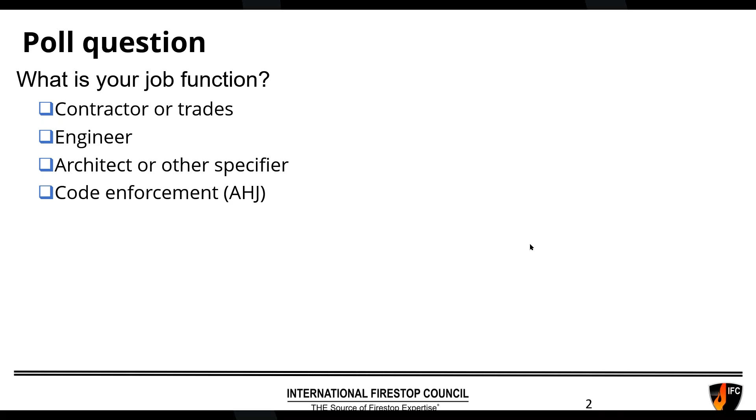So what are the objectives for today? Well, we're going to talk about joints and about penetrations. We'll talk about joints first. Why? Because that's where the change is the largest in the 2020 National Building Code of Canada.

So we're going to speak about how the fire stopping of joints was governed by a general continuity requirement in previous editions, and how now in the 2020 edition, there are some very specific joint requirements telling you pretty much exactly what to do. For penetrations, we'll do similarly. We'll talk about the 2015 and previous NBC code requirements, just so we have that as a baseline, and then we'll go through the changes in the 2020 code.

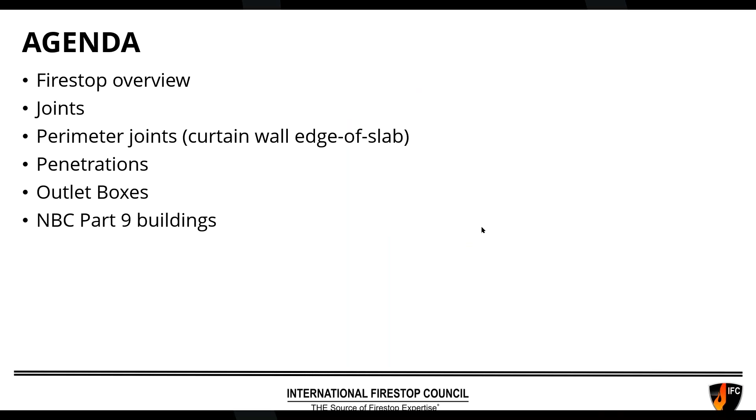All right, so we're going to structure the agenda as follows. First, we'll just do a general Firestop overview. We'll discuss joints. We'll discuss a very specific joint after that, the perimeter joint, also known as the curtain wall edge of slab joint. We will discuss penetrations, penetrations that only go through one side of the wall, meaning outlet boxes. Then for those of you who work in smaller buildings, known as Building Code Part 9, we'll discuss any differences and similarities between the Part 3 buildings and Part 9. So the general presentation today will focus on Part 3 of the Building Code, because that's for large and substantial buildings. I will give you the differences in Part 9 in case you do work on those buildings.

Now let's discuss fire separations. I'll discuss in a moment what the definition of a fire separation is, but the important thing to realize is that it's the building code that decides which assemblies are going to be fire resistance rated fire separations. So when it comes to walls, wall fire separations are more commonly based on what is being protected. So for example, if it's a corridor, that would be a fire separation, a fire rated corridor, maybe protecting individual dwelling units.

Separating different occupancies, separating hazards in a building. So that would be the need for fire walls within a building. And then the code will separately, usually independently, also require fire rated floors.

And those will be more of a function of the height and the area of the building. So the bigger the building gets, the more likely you're going to need a fire rated floor, and it may even go to 1 hour, 2 hours or more. And also the taller the building gets, you'll also need more fire rated floors.

Why? Because in each case, what we're trying to do is win a race. And the race is between the fire starting, growing and spreading, smoke spreading, fire spreading, and people trying to get out of the building, as well as first responders needing to get into the building to do whatever they're going to do, whether it's search and rescue or fire suppression.

So just to give an overview of how the National Building Code of Canada has evolved on fire stopping, it is not new. In the 2005 and 2010 editions, it only touched on the basics. It was very kind of rudimentary. There were some confusing and, I would call, ill-advised exceptions or specific requirements, things that added confusion more than clarity. The definition of fire separation was improved in those cycles, so that was a good help. In other words, telling us what our fire separations are all about.

In the 2015 edition, there was a revision made to add membrane penetrations, meaning holes for outlet boxes, and we will discuss those in detail. Now in 2020, this is where there was a large number of changes. The committee put together a Firestop task group for several years with some great representation from across the country. Very highly knowledgeable people from UL, ULC, from each of the provinces, from some of the cities.

And so they just did a great job at revising the code to really bring it pretty close to the state of the art. A lot of the bad exceptions that existed previously were deleted, and where there was some vagueness or things were causing confusion, clarity was added to those code articles.

Now, some improvements can still be made. Unfortunately, those won't come out in the 2025 edition. There were some other priorities for the code committee. They had a shortened cycle since the 2020 code only came out in April of 2022. So with that shortened cycle, there was really no opportunity to prioritize or work on anything Firestop related. So hopefully in the 2030 edition, there may be some further improvements.

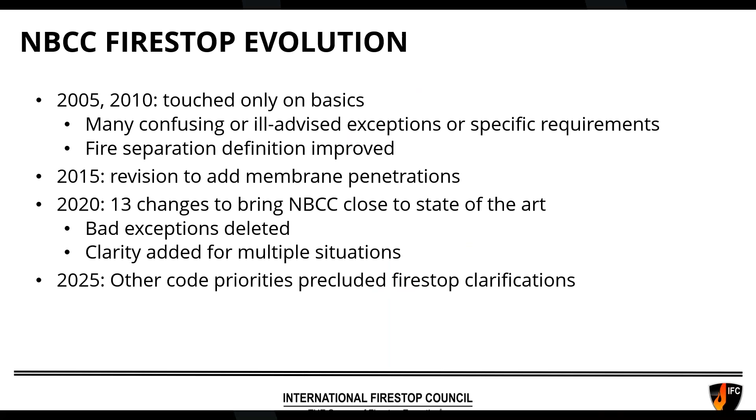So next, let's talk about what is fire stopping. I'm going to start with an unofficial definition, and after that, I'll show you the code definition. So unofficially, but maybe more clearly, fire stopping is a precisely tested means and methods to restrict the spread of fire and smoke through a breach or gap in a fire resistance rated assembly. So in other words, you have this perfectly good 6-sided box with 1 hour, 2 hour, 3 hour, 4 hour rated fire separations, but you're going to have holes in it.

Now, today we're not going to deal with doors and windows. That's a seminar for another industry and another day. But today we will deal with all the joints that are inevitable in that construction, and we'll deal with the penetrations in that construction as well.

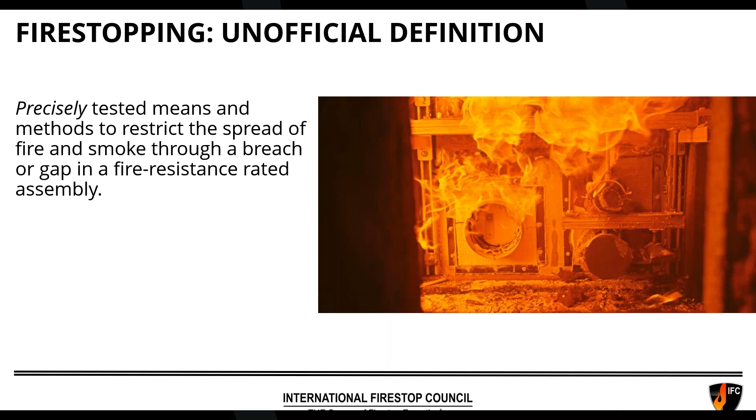Now, the code does have a definition. The definition itself has not changed, but they have changed the word. For some reason, the 2015 and previous editions of the NBC were somewhat of a laggard. It was the only standard out there that was using fire stop as 2 words. Now they've pretty much harmonized, including with the fire test method. So it's just 1 word, fire stop. So if you had been using it as 2 words, I'd encourage you to just harmonize as well and start using it as 1 word.

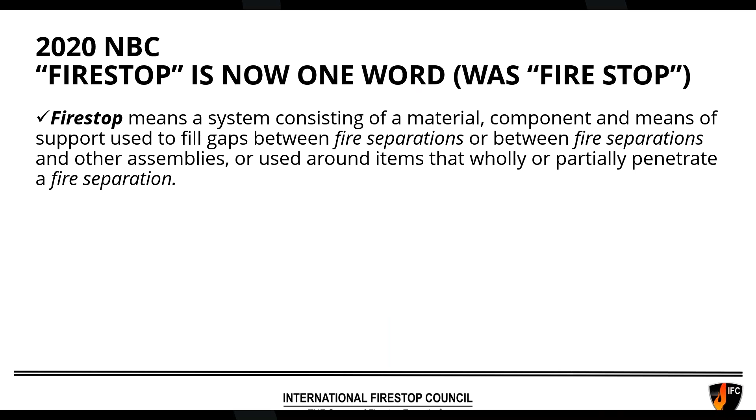So here's the code definition. It is a system, and I want to pause there because that is the single most important word. So I'm glad it's right at the beginning. It's not a material, it's not a red caulk, it's not a product in a box, it is a system. It consists of a material, component, and means of support used to fill a gap between fire separations or between fire separations and other assemblies. So for example, between a wall and a floor, even if the floor was not rated, or used around items that wholly or partially penetrate a fire separation. So if you have anything going into a fire separation, or if it goes all the way through, those require fire stopping as well.

Aaron, if you can, it would be great if you could show the results of the poll after you close it.

All right, sharing the screen.

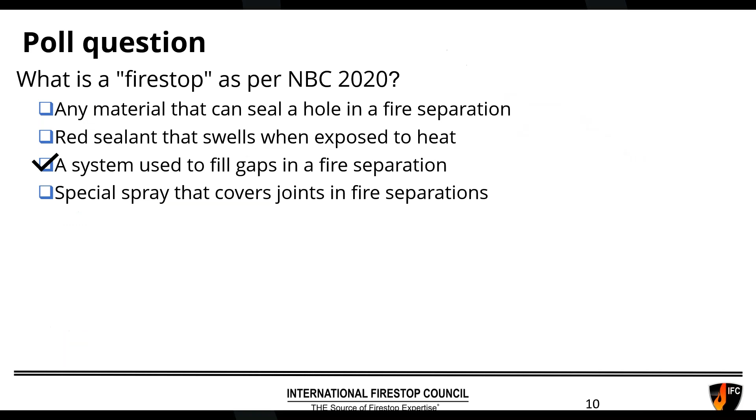All right, okay. So continuing on, I said that I would give you the definition of a fire separation. So the code has a very neat and tidy, just few words for that. It's a construction assembly that acts as a barrier against the spread of fire. So almost self-evident. But in the National Building Code of Canada, if you're not aware of it, there is a section called the Annex 1. And what they do there is basically non-enforceable, but it's the committee giving you additional information so that you would help understand what the enforceable parts of the code say. So there's a very useful annex note for the definition of fire separation.

It's generally understood that the term fire refers to all products of combustion, including heat and smoke. So that's useful to know, and that we're going to want to stop heat and smoke through a fire separation. Although fire separation is not always required to have a fire resistance rating, it should act as a barrier to the spread of smoke and fire until some type of response is initiated. If the fire resistance rating of a fire separation is permitted to be waived on the basis of the presence of an automatic sprinkler system, it is nonetheless the intent of the code that the fire separation be constructed so that it will remain in place and act as a barrier against the spread of smoke until the sprinklers have actuated. So by the way, this might surprise you.

There are some fire separations that are going to be 0 rated. As this annex note tells you, it still has to stop the movement of fire and smoke until some kind of response is initiated or actuated. Now, the most common case for that is where there's a sprinkler trade-off in the code. So the code is good at pretty much telling you what you must do, but in some cases the code only gives you the option or the incentive to put in fire sprinklers in the building. And when it does that, it often does that by reducing the rating of a fire separation to 0. Now, candidly, as you look out in building construction, 95% plus, maybe 98% plus of fire separations will be fire resistance rated. But some may be 0 rated, so just making you aware of that.

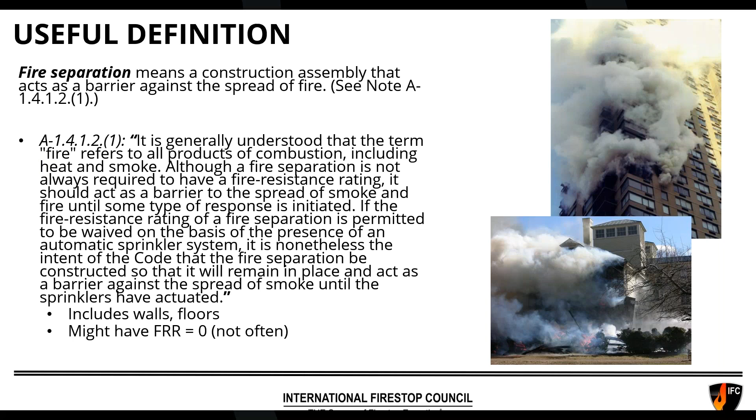So as I said earlier, we're going to discuss fire stopping as 4 separate major categories. We'll talk about through penetration fire stops, membrane penetration fire stops that only go through one side of a wall or one side of a ceiling, fire resistive joint systems, and then one very specific joint system, and that's the perimeter fire containment system, what you do at the edge of slab at the curtain wall.

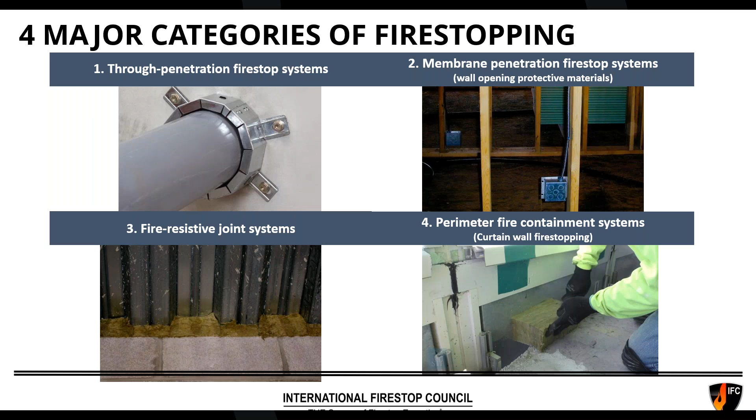Here's what the 2015 code said. So this was the text, and it was called continuity of fire separations. The continuity of a fire separation shall be maintained where it abuts another fire separation, a floor, a ceiling, a roof, or an exterior wall assembly.

So as I mentioned, if you have a rated wall, no matter what direction it goes to, up, down, sideways, it has to be continuous all the way until it abuts an adjacent assembly of some kind. And here we can read the annex note from 2015 code and earlier. The continuity of a fire separation where it abuts against another fire separation, floor, ceiling, or exterior wall is maintained by filling all openings at the juncture of the assemblies with a material that will ensure the integrity of the fire separation at that location.

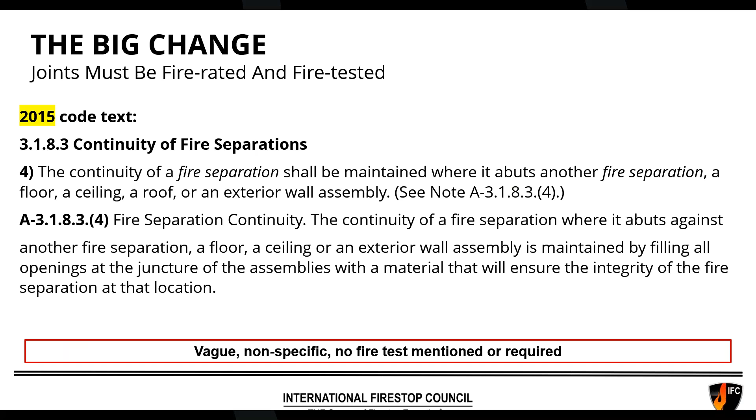So previous to the 2020 code, they were still using the terminology of material. And why is that? Because if you look at the definition or the requirement for continuity, it doesn't mention anything about a test or what the test should be or what the rating of the test should be. So really, it was very simplistic. It just said you needed to do something. Now, fortunately, Canadian design professionals seem to be very knowledgeable and have been installing systems nevertheless for more than a decade, but the 2015 code did not exactly say that.

So now let's compare that to the 2020 code text. For continuity of separations, it's the same section title, but now the content is very different. So here's what it says. Except as provided in sentence 5, the continuity of a fire separation having a fire resistance rating that abuts another fire separation, a floor, a ceiling, or a roof, so in other words, side to side to top to bottom, shall be maintained by a fire stop. So notice that earlier on it had said a material, now it says maintained by a fire stop, conforming to sentence 3. Sentence 3 will now give us the details of how we accomplish that.

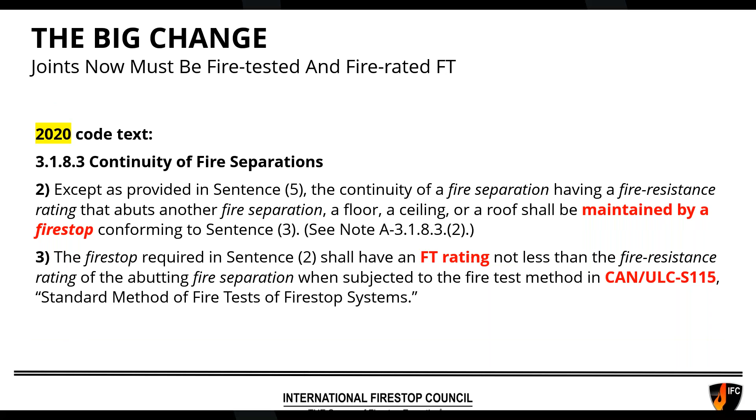The fire stop required in sentence 2 shall have an FT rating. So now we know the rating, and I'll explain what the ratings are. Not less than the fire resistance rating of the abutting fire separation when subjected to the fire test method in CAN ULC S115, standard method of fire tests of fire stop systems. So the key points to remember here: the joint has to be sealed with a fire stop. The rating is an FT rating, and I'll show you the ratings. And it's tested in the standard Canadian test, which has been used for decades, which is CAN ULC S115. You'll see a reference to that multiple times today.

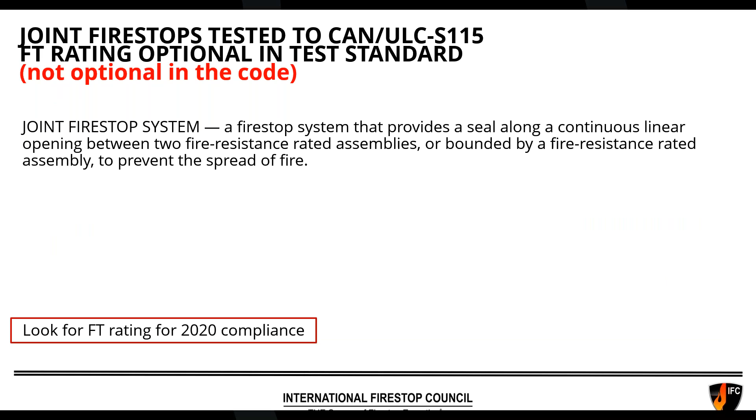So there is a definition of a joint fire stop system. Let me go through the definition first: it is a fire stop system that provides a seal along a continuous linear opening between two fire resistance rated assemblies or bounded by a fire resistance rated assembly. In other words, sometimes it's where a fire rated assembly meets a non-fire rated assembly to prevent the spread of fire. Now, in the test method itself, CAN ULC S115, it does not mandate that you have to achieve any kind of rating, as long as you achieve an F rating, which is the fire rating. The T rating is essentially optional, but as you saw in the previous slide, the T rating is now mandatory in the 2020 code. You need an FT rating.

So how do we measure these F and T ratings? Fire is just the passage of flame, passage of fire. And the T rating is done by putting thermocouples on the non-fire side of the test assembly. So you can see the thermocouples here. They're little electrical pads, I'll call them, or electrical probes. They have a little pad on top of them so that we're not measuring the room temperature, we're measuring the joint temperature. And when it gets too hot on the non-fire side, that's the point at which we have failed the T rating.

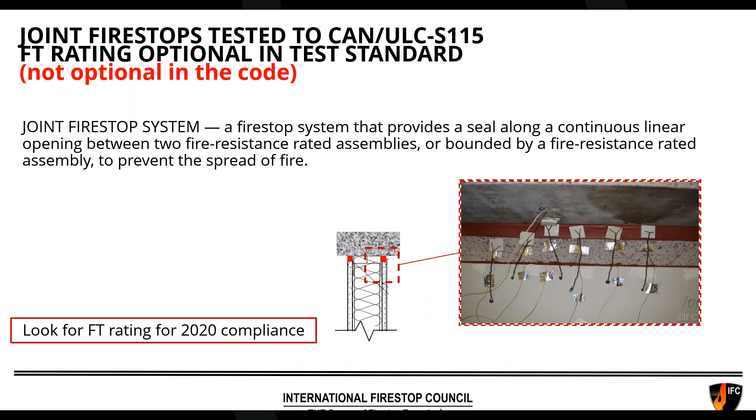So now I've shown you a picture of a rather small assembly here. The dimensions of the test apparatus are maybe about 1 meter by 1 meter, sometimes a bit larger. Now, some joints have to be tested in much larger scale furnaces. In other words, it's the same scale as the CAN ULC S101 furnace, and that's expansion joints. Expansion joints are those large joints you see in a parking garage or that you don't see in a building between major pieces of the building slab. And so those are much larger, the gaps are much larger, they may be 100 millimeters or even 200 millimeters. And because of their size, they have to be tested in much larger scale furnaces, but the ratings are the same, and basically the test method is analogous, just in a bigger scale.

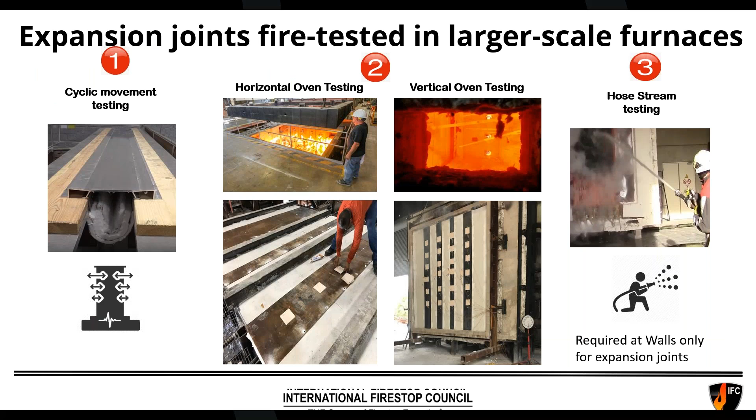Now, another thing we have to remember with joints is that joints in a building will actually move. Very few joints are static, most are dynamic. Why is that? Because things are happening to a building all the time. As an example, when you have a floor slab, it doesn't look like it, but as you add a live load to that floor, it will move. As it gets warmer and colder, things expand and cool, you will get movement.

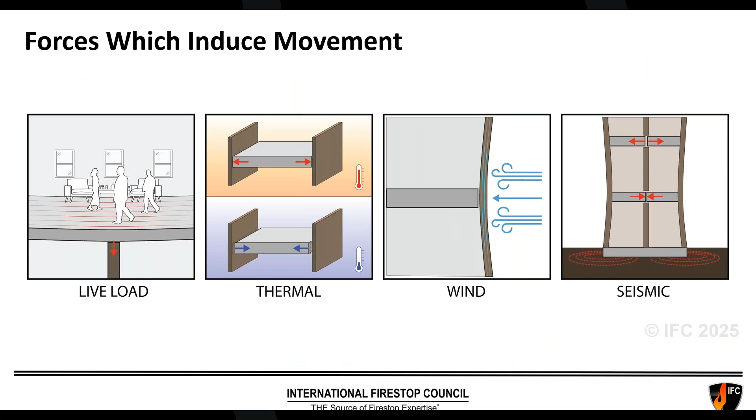When wind blows on a building, you get movement. And of course, if you're in a seismic area, you know for sure that if there happened to be a tremor or an earthquake, there will be movement. So the code does mandate that the designer and the installers consider that movement. So this is not new to the 2020 code. That was already required in previous editions of the code.

If I look at Annex Note A-3.1.8.1, here's the exact words. When choosing products for fire stopping, the physical characteristics of the material used at the joints, as well as the nature of the assembly and its potential movement, should be taken into consideration. So the reminder has always been there: don't forget about the movement in selecting your joint.

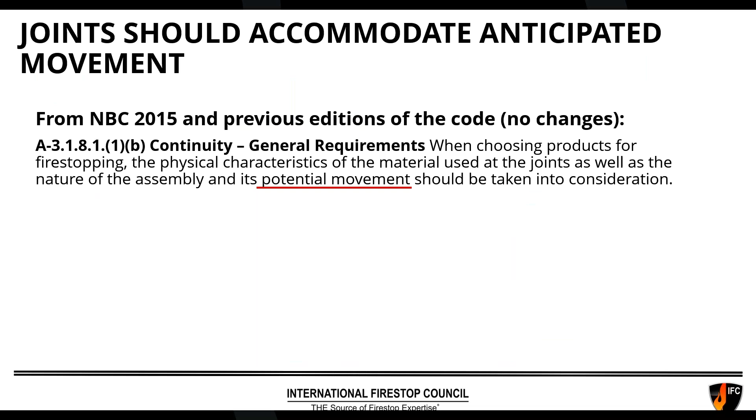Now, in case you're wondering how we test that movement, we actually test it before doing the fire test on the joint. So it's per an ASTM test standard, ASTM E1399, tells us exactly how to run that cycling. It's basically 500 cycles essentially in most movement tests. So you can see on the left the picture, there are hydraulic jacks that basically cycle that joint up and down, closed and open, closed and open. And so this is how we make sure that once the joint is installed, it will survive and continue moving through the life of the building.

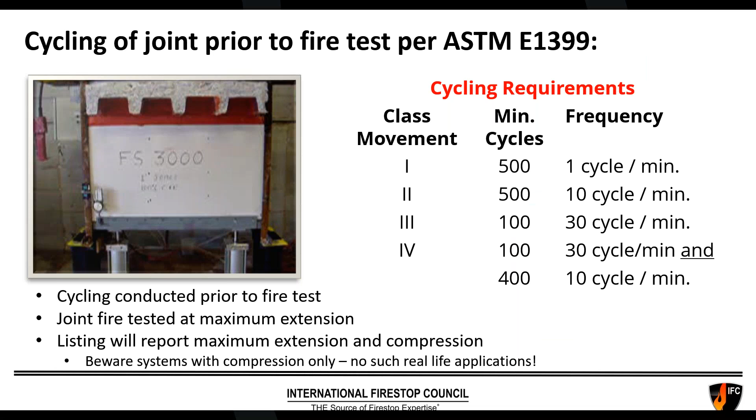There's been a good annex note added to explain joint continuity. I'm not going to go through all of it. You have it in your handout, so if you want to read it at your leisure, but I'll just point out a few of the things that are important here. For example, it does talk about joints being needed in the first paragraph, even without a fire resistance rating, where it abuts a fire separation.

Next, in the middle paragraph, what I want to point out is that there's a separate requirement for curtain wall joints. So we will get into that in more detail, but it's discussed in more detail here in the annex. But finally, what I wanted to mention is what's in the last paragraph. So once again, the code is reminding us about movement. So if you look at where it's underlined, it says the rating of the joint system will be maintained even after the joint has cycled through its anticipated range of movement over the service life of the building.

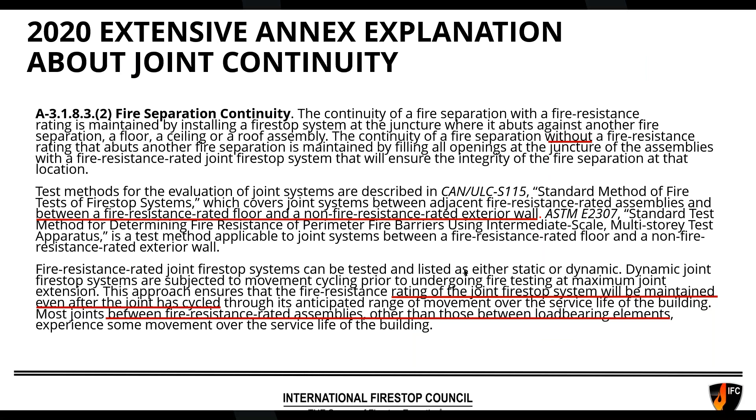Most joints between fire resistance rated assemblies, other than those between load-bearing elements, experience some movement over the service life of the building. So if someone proposes to you a static joint system, you should ask a few questions. And even if someone proposed to you a dynamic joint system, someone has to verify that it will accommodate enough movement as the design engineers or architects will tell you needs to happen.

Now, because the code added this very clear section on joints, it was felt that it was important just to mention that you don't need a joint fire stop system wherever you have a joint between two boards. So a brand new section was added to the code under continuity, and basically it's for the joints at corners and between walls and floors when you have gypsum board. Essentially, it's telling you that if you have the joint as required in the ULC fire tested assembly, fire listed assembly, that you don't need fire stopping there.

So basically the thing to remember is if you read the listing for rated walls, you're going to find that it always tells you need butted joints. As soon as the boards are apart, physically apart, then they're no longer butted. But if you have butted joints, it's perfectly fine to mud and tape them. Same goes for the interior corners, exterior corners, etc.

So now we'll start another poll question. Aaron, if you can launch this one. So which are true regarding joint fire stops? And I'd like you to click all the ones that you think are true. More than one is true. Aaron, I see that you have to scroll it down a bit so people can see all 4 potential answers. Or wait, or does the user do that? I guess the user does that, I apologize.

So there are 4 potential answers, and if you could click on the ones that you think are true regarding joint fire stops. And I'll tell you already, more than one is true, but let's see if you can figure out which one is true and which one is not.

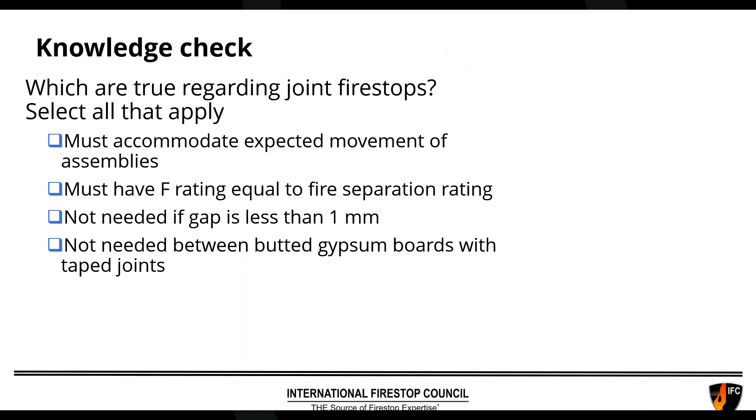But congratulations, people got it right on the last one, not needed between butted gypsum boards with tape joints. Now, one that I have to reemphasize is that the rating for joints is not an F rating, it is the FT rating. So you need to prevent fire spread, and a code compliant joint system has to prevent the temperature from being exceeded on the non-fire side. So for those of you who said you need an F rating, you were halfway there. In fact, what I want you to remember is that you need an FT rating in all cases.

All right, so for those of you who are AHJs, I'll make it easy for inspection and plan review. First of all, ask for the listed system used for every joint type that's either in or between fire rated walls or floors. If someone's just walking around with a caulking gun, that is not going to cut it. Fire stopping is a system. Joint fire stops are a system, and there's no system that's just a caulk in a tube. There are some preformed materials these days that are preformed joint systems. So ask for the listed system. There are over 2,100 listed systems for Canada.

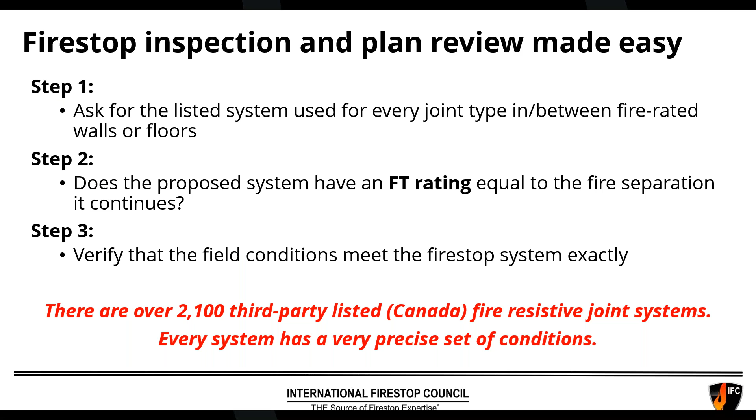Next, if you're doing an evaluation, make sure that the proposed system has the FT rating. I just went over that after the quiz, the poll. You're looking for an FT rating in all cases for joints per the 2020 code. And then if you're truly doing a verification, whether you're the architect, engineer, or AHJ, make sure that the field conditions meet the Firestop system exactly. Every system has a very precise set of conditions, so make sure it's installed exactly that way.

Next, we'll discuss a very specific joint, the curtain wall edge of slab joint, the perimeter joint Firestop. If you haven't seen a curtain wall before, prior to installation of finished materials, knee walls, etc., there was always going to be a gap between the floor slab and the curtain wall, as the word would hint, I guess, that it's a curtain. And here's what the 2020 code now tells us. Except as provided in sentence 5, joints located in a horizontal plane between a floor and an exterior wall shall be sealed by a Firestop.

So pause there, Firestop being a system, that when subjected to a fire test method in ASTM E2307, aha. So this is interesting. It's not the standard fire test method we use for penetrations and joints. It is a very particular, much larger scale test method for the perimeter joint. It's ASTM E2307. Not a new test standard. It was issued almost 20 years ago, and it's been used in the US building code for almost that long. And then the rating you need from that is an F rating, the fire rating.

So notice in this case, you do not need the FT rating. Why is that? Because curtain walls are made up mostly of metal, and it would be almost impossible to get an FT rating. Why? Because all the metal pieces would be conducting heat from the floor below to the floor above, and the FT rating is just not a practical objective. So for curtain walls, for the curtain wall joint, you only need to get an F rating.

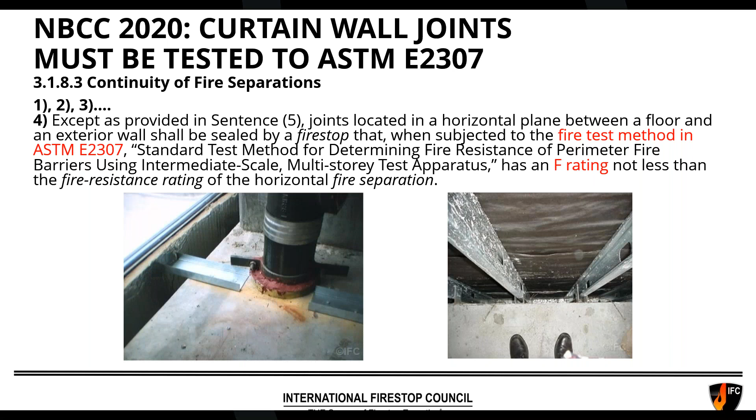Now, I want to mention that the code says you need this when the joints are located in a horizontal plane between a floor and an exterior wall. All right, so the requirement for E2307 system is in the horizontal plane between the floor and the exterior wall. This leaves a little bit of ambiguity as to what to do when you have a window wall.

So in this case, I just have the cross section of a window wall, meaning that the wall is sitting load-bearing right on top of the floor. It is not in a separate plane. It is not hanging down like a curtain. So per a plain reading of the code language, theoretically, this would not need any fire stopping. If someone does ask for fire stopping, there are systems for that.

For example, this one that I'm showing here is a system where you can see that the sealant is below the floor and above the floor. But a plain reading of the code requirement is that you do not require a fire rated system per E2307. What I would suggest though, in case there's any ambiguity, whenever there are gray areas, is that it's the authority having jurisdiction that makes the final call. So if you're unsure in your jurisdiction, then find out from the AHJ. But as I said, a plain reading would indicate that this would not require any fire stopping.

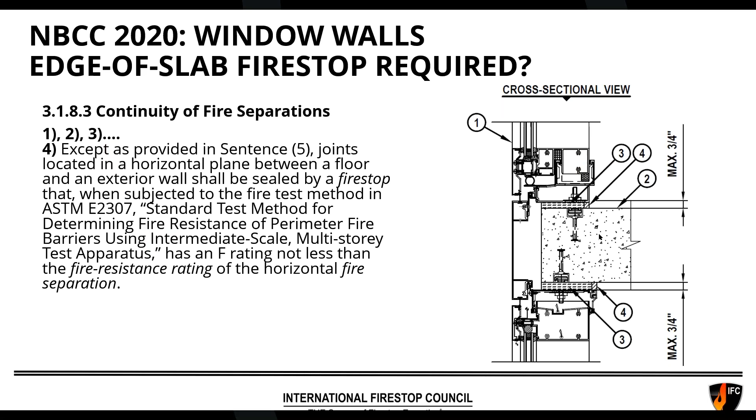Now I want to show you more about this ASTM E2307 test. It's called the intermediate scale multi-story apparatus. It's intermediate scale because it's not quite full scale. We build buildings much taller for one given floor. This is, I think, less than 3 meters, maybe about 2.5 meters for the bottom floor. And of course, we know that a true story is taller than that.

It has the fire in the room on the underside, on the ground floor, I'll call it. So the fire is started there at time 0, and then at T equals 5 minutes, a second burner called the window burner is started. The intention of that is to simulate what happens after flashover. Flashover is when flames break the window and come essentially licking along the side of the window. The test is designed to simulate that as realistically as possible. So it has the fire in the room down below, and it has the fire essentially exposing that joint from the outside.

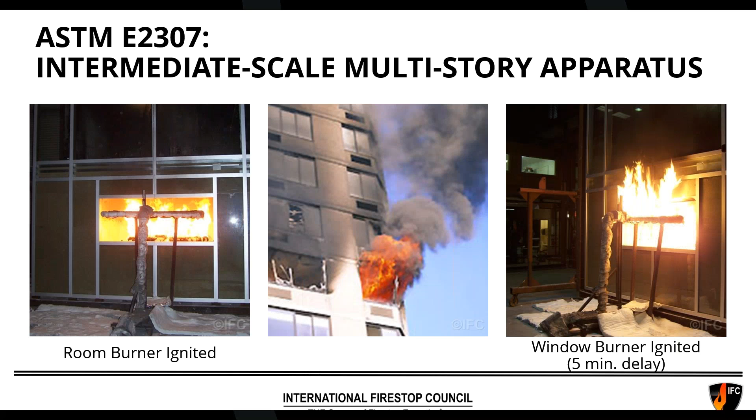Now, what I need to emphasize with all that is that E2307 is a wall system test. It is not merely testing the joint. Now, the joint is where the fire stopping is going to happen, or where we're going to have to do something. But that fire stopping is going to be heavily, heavily dependent on the behavior of that curtain wall. In other words, that curtain wall has some reaction to fire. It might bend, it might buckle, it might droop, it might sag, it might hopefully not fall out completely. And so what we have to do at the perimeter gap is going to be heavily dependent on the behavior of that spandrel panel or of a shadow box or back pan, etc.

And so we understand that the curtain wall is not rated. Nobody in any country is building fire-rated curtain walls. It would be dramatically too expensive. But nevertheless, that curtain wall, even though it's not fire resistance rated, still has a reaction to fire. And so the key variable here is the behavior of that spandrel when exposed to fire. So system listings for ASTM E2307 will always include great details on the spandrel construction, the height of the spandrel, what is the position of the spandrel, does it line up with the floor, does it line up several centimeters above the floor, what is it insulated with, how is it reinforced.

Of course, we also need the details of the safing material. The safing gap is that gap between the floor slab and the curtain wall. So the system will tell you in great detail what forming material you need there, what compression, etc., and what material you need to seal that. Now, by the way, that doesn't just seal the smoke and hot gases. That seal on the joint also acts kind of as a glue to hold it all together. Without that, to be honest, when that curtain wall would flex, a lot of it would probably come apart.

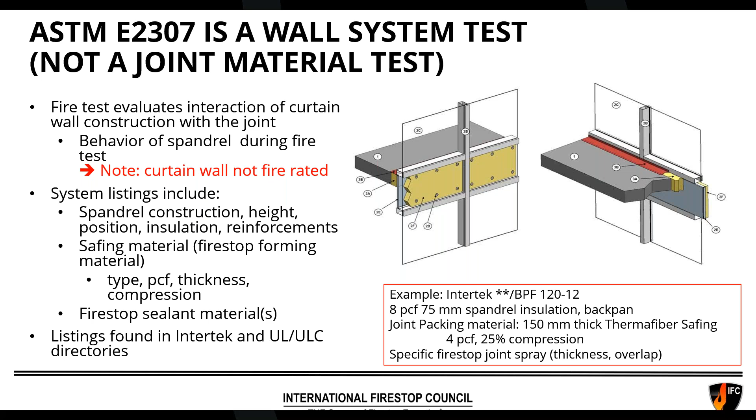I should mention there is no difference between Canada and the US. So when you look up the listings, doesn't matter if it says UL, ULC, ASTM, whatever, it's really all the same because there is only one curtain wall fire stopping test in North America, E2307.

Now, I want to mention that you want to be on the lookout, because in 2015, it would have been very easy for a manufacturer to provide an engineering judgment for a curtain wall. Why? Because what it used to say, and I have the wording here from 2015, all you had to do was fill all openings at the juncture of the assemblies. So if you had the floor slab, all you had to make sure was that safing gap, that it had a fire resistance rating that extended to the curtain wall. But there was no part of the 2015 code that said you had to consider what's going to happen to the curtain wall during a fire.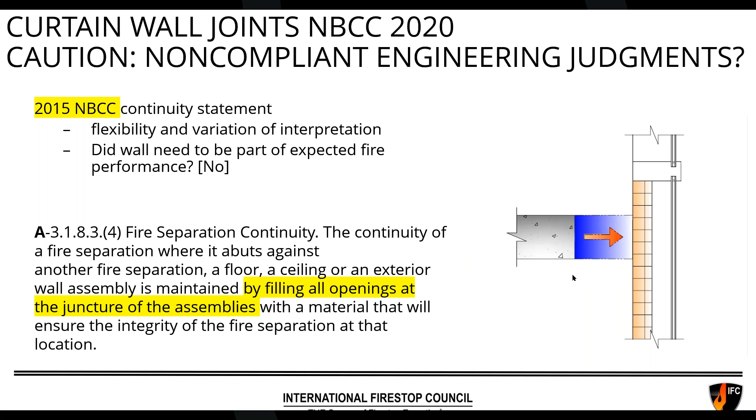So now, under 2020, the joint system is clearly tested E2307. That's absolutely a system test, very, very heavily dependent on the curtain wall behavior in a fire. So if you're doing plan review, for example, if you're an authority having jurisdiction, your code enforcer, make sure that any engineering judgment you get or the system you get matches the spandrel construction of the actual building. Same thing, that you have to match the height of the spandrel panel, its position relative to the floor. Is it to go above the floor or not? That makes a big difference. What is the insulation of the spandrel panel, the reinforcements, again, the safing material. So you have to get a perfect match or near perfect on all of those.

Now, I mentioned a few red flags here because eventually you're going to get an engineering judgment proposed to you by someone who is optimistic, hoping that perhaps you'll accept their engineering judgment, but in fact may not be a good match. Why? Because there's so many curtain wall designs out there, and most manufacturers have done some fair number of curtain wall testing to E2307, but perhaps none that match the curtain wall that you're about to construct. And so if you see words like this, be aware that it may be because that manufacturer is telling you very openly that they don't have a match.

So, curtain wall designed by others. That's the manufacturer of the engineering judgment telling you, we don't know what the curtain wall is, we don't care, it's by someone else. And well, here's your engineering judgment that just talks about the gap. You might get some words that are a little more involved.

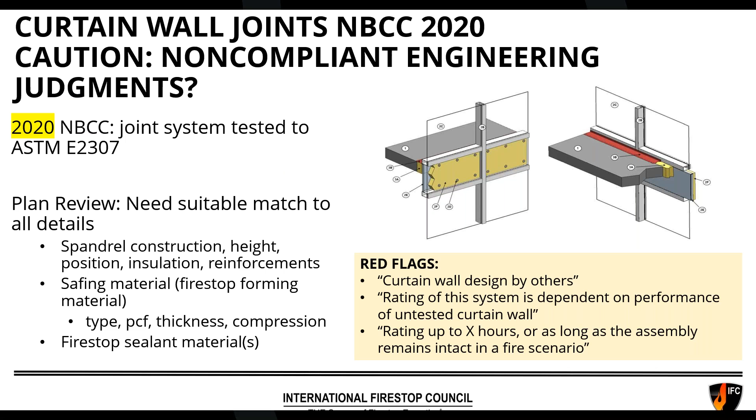So these details matter, by the way, and it had actually happened. There was a high-rise fire in downtown Los Angeles, and one of the key learnings from that was we better do the curtain wall fire stopping right. So here's what happened. The picture on the right shows the curtain wall. Because it was not properly fire stopped and there was some deflection of the curtain wall, the safing at the gap just fell to the floor below, and there was premature fire spread from one story to the next, always through that curtain wall gap. So history has taught us that yes, it does pay to do curtain wall fire stopping correctly. And like I said many times now, that does involve considering how the curtain wall will behave.

So let's try a poll again. Which of these factors will impact the time to failure of a perimeter joint fire stop system? There's more than one answer here. So please click all the ones that you think will impact how long the perimeter joint fire stop system will last. Will it last a whole hour? Will it only last 2 minutes? Which of these elements of that system do you think will have an impact? Click on the ones you think will impact the fire resistance.

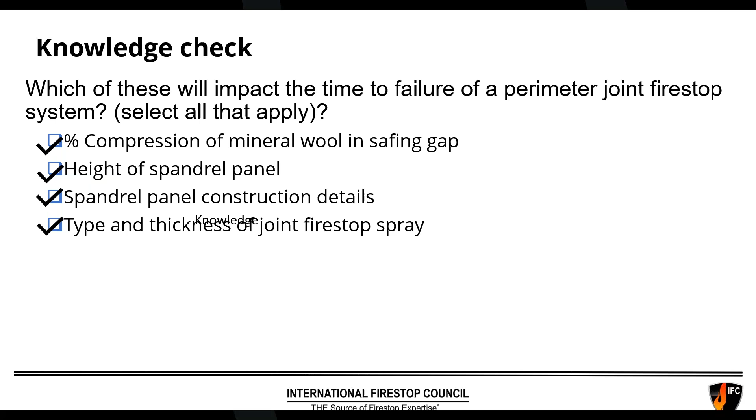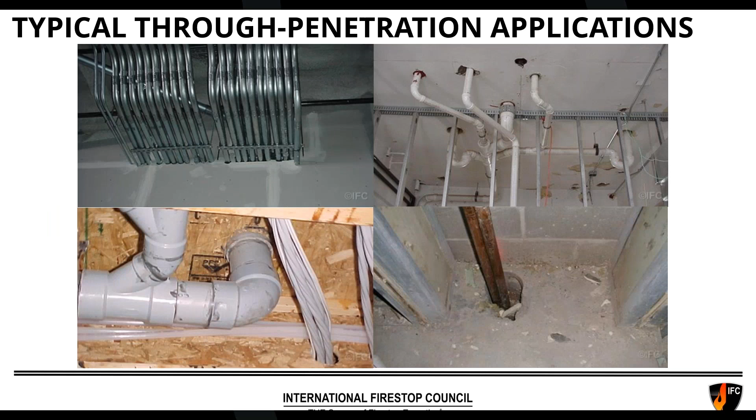Next, let's discuss penetrations. Here you just have a sampling of penetrations. It's not necessarily one pipe, one hole. We often put multiple penetrations through one hole or a slot or something like that. Top right, probably a hotel or a condo or something like that. You see all the plumbing penetrations. I wanted to show you bottom left because you might think, well, geez, that's wood. Does that really have a fire resistance rating? And the answer is absolutely. There are plenty of buildings built of stick frame with wood floor ceiling assemblies, and those assemblies will have a fire resistance rating and do need to be fire stopped just like any other fire separation.

So what is the requirement here? This has not changed that much from the 2015 and previous editions. What I'll show you, with the strike-through wording and the underlined wording, are the only changes. So here's what this tells you to do. Except as provided in Sentences 2 to 7, so as usual, there are some exceptions. Penetrations of a fire separation or of a membrane forming part of an assembly. I find when I explain this, a lot of people don't quite understand what that latter part means, membrane forming part of an assembly. So I'll have a slide coming right up that'll show you what that means.

But for now, know that if you penetrate a fire separation that needs a fire resistance rating, what do you have to do? You have to seal it by a firestop. So again, remember that's a system. When subjected to the fire test method CAN/ULC-S115, so you know the test method. And the default is that you must have an F rating.

So it means that you don't have to have a T rating. It's okay if it does not have an FT rating, but it must have an F rating. And here's the change: the code previously said that that F rating needed to be no less than the fire protection rating of the assembly.

The fire protection rating is just the rating we give to doors and windows. And if you didn't know, those are usually 3/4 of the rating of the fire separation. So in a 1-hour wall, you'll have a 45-minute door or 45-minute rated glass. So nobody's really been developing Firestop systems that only have 3/4 ratings like this. All manufacturers have been doing full fire resistance ratings of a full hour: 1 hour, 2 hours, 3 hours, etc.

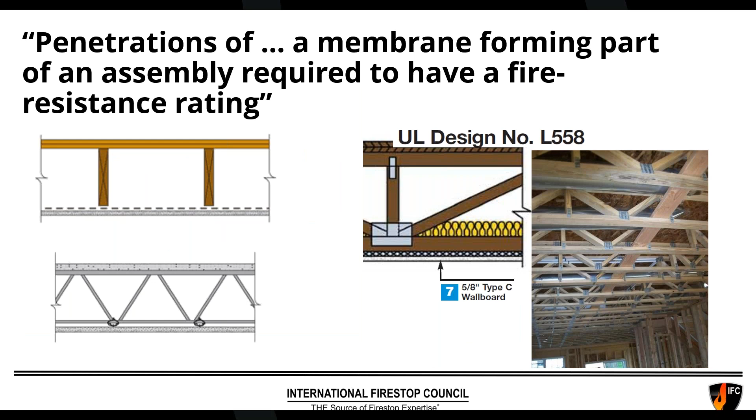The membrane could typically be 1 or more layers of gypsum board, typically type C, ceiling type gypsum board. Some systems are with type X wallboard. There are actually some systems with mineral board type, just like you would see in a drop ceiling. There are systems like that that provide fire resistance rated floor ceiling assemblies. So now when we go back to the code language, you'll understand what it talks about when it says penetrations of a fire separation or a membrane forming part of an assembly.

As you can imagine, if you make a hole in that membrane on the underside of one of those floor ceiling assemblies with very poor fire resistance, that is heading towards the collapse of that floor, premature collapse. And so that is equally important, maybe sometimes even more important, as firestopping of a full fire separation.

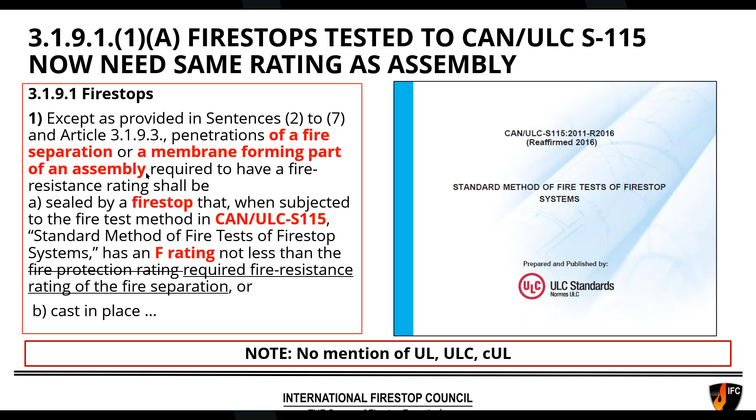So next, again, we discussed the ratings. F is the time for flame to penetrate to the unexposed side of the fire rated assembly. T means the temperature rise wasn't too high, and the test standard in the code defined too high as a temperature rise of 181 Celsius above the ambient temperature. If you meet both F and T, then that's called an FT rating for CAN/ULC-S115.

And just in case you see it, so you'll know what it is, if you see FH or FTH, H stands for a hose stream test. In the US, that is mandatory. It's been mandatory for probably 100 years or more. And so if there is an FH or FTH rating, it means that that system would also be eligible to be listed for US applications, meeting the International Building Code.

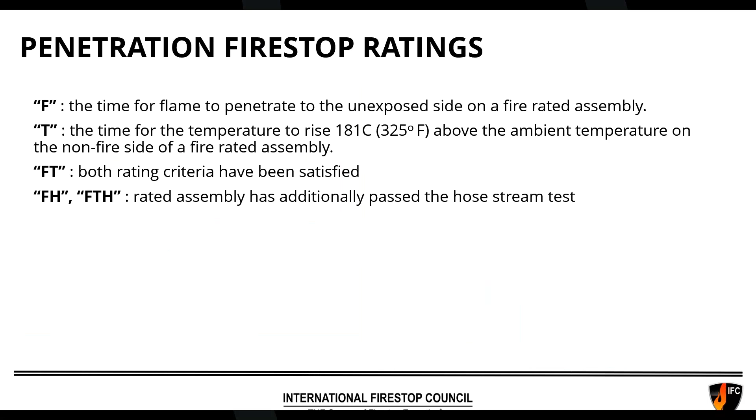So now you might have noticed that there was option A in Firestops, and that was basically a Firestop system tested to CAN/ULC-S115, but there is also an option B, and it's been there for years and years, and it said cast in place. Now here's the problem, just putting the words cast in place doesn't quite cover it. Why? Because if something you cast in place will melt or burn, that's going to leave a big hole behind. So for example, I'll play a little video here.

So recognizing that some more words were needed to make this a proper exemption or a proper specification, the code has now specified that cast in place is acceptable where the item penetrating the fire separation is steel, ferrous, copper, concrete, or masonry.

In other words, all things that will not melt and will not burn. So importantly, notice that aluminum is not there. I know that aluminum conduit is becoming more and more popular. If you cast in an aluminum conduit, it is going to have to be fire stopped. Why is that? Because aluminum will melt in a standard fire.

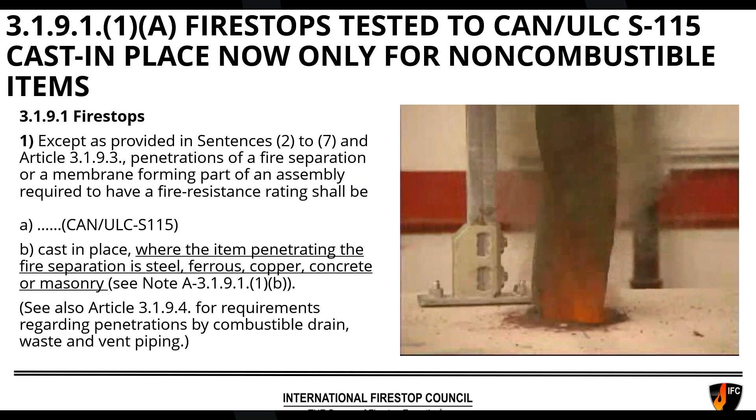Now, by the way, there is a section on combustible DWV pipes, which doesn't allow cast-in anyway, which it never should have. But just so you'll know, if you had been in the habit of looking at cast-in things, make sure that now and in the future, you only cast things that are not melting and not burning. Now, here's an example of something that is completely inadequate, and actually it's an actual photo from the field that the installer thought was adequate.

And that's by reading the annex note for that code article. So if you read the annex note for penetrations, it says the intention behind the use of the term cast in place is to reinforce that there are to be no gaps between the building service or penetrating item and the membrane or assembly it penetrates. So no gaps, just remember that and you're good to go. No gaps between the building service or penetrating item.

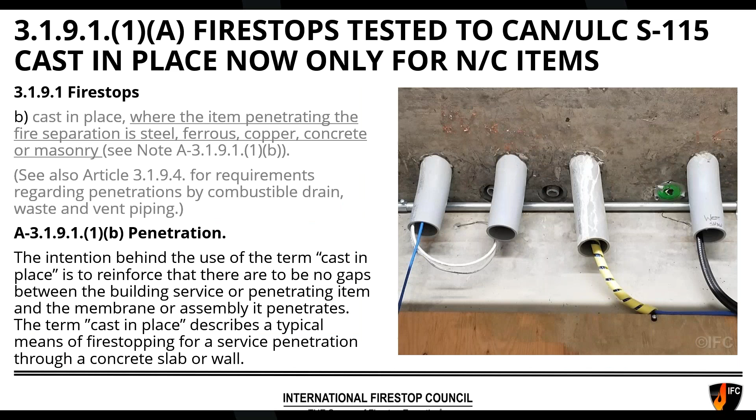The term cast in place describes the typical means of fire stopping for service penetration through a concrete slab or wall. So here we can see in this installation, obviously, even though that PVC was cast in, you do have a gap around it. So now, even if you do cast in a steel sleeve, keep in mind that you're going to have to fire stop on the inside of it because you cannot have a space between the service item and the assembly.

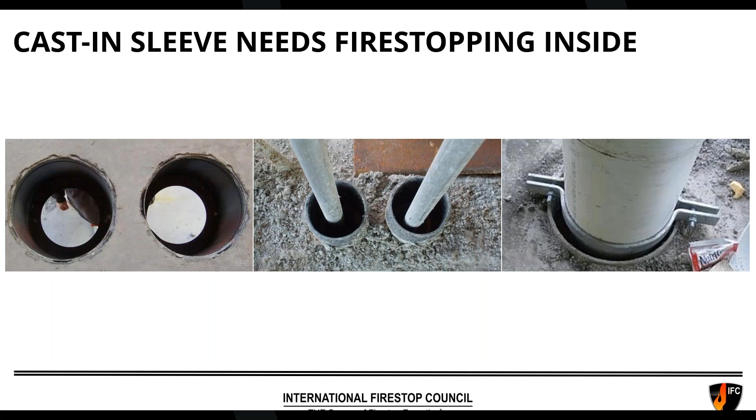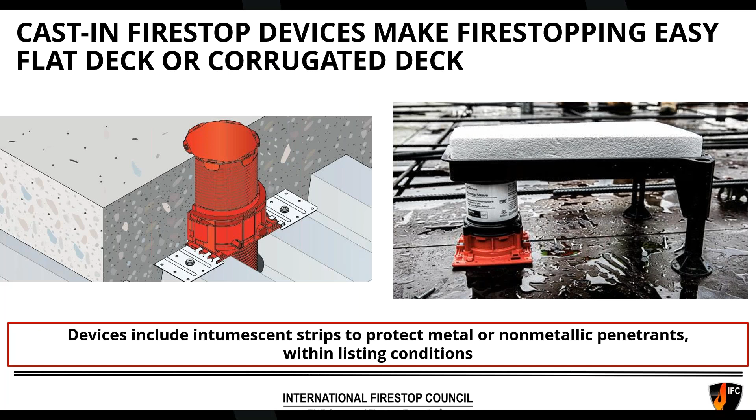Most manufacturers have cast-in devices. So the fire stopping is built right into those. The way they work is that they have the fire stop material. They have intumescent strips that are basically built into these devices. Now, this is the first time I've used the word intumescent. So let me show you a short video to give you an idea of what intumescent means.

So in this case, it's showing the video of a cast-in fire stop device. And with the intumescent strip, it's being exposed to heat. And now you're going to see what that intumescent product does as it's exposed to that heat. And what it does, it basically closes up the hole. And believe it or not, it does that with quite a bit of force.

One of the properties that we can measure with intumescent materials is not only by how many times they expand, but also with how much force they expand. So if there was a plastic pipe here, as it melts, this would actually crush and close the plastic pipe, thus preventing the fire from spreading to the next room or the floor above.

So we're ready for another poll. How do you prevent vertical fire spread? This is an actual situation, so you're ready to be amateur fire stoppers now. How do you prevent vertical fire spread for a cable bundle routed through a steel sleeve cast into a concrete floor? There's only one correct answer, so choose the correct answer that you would do to fire stop a cable bundle through a steel sleeve that's cast into a concrete floor.

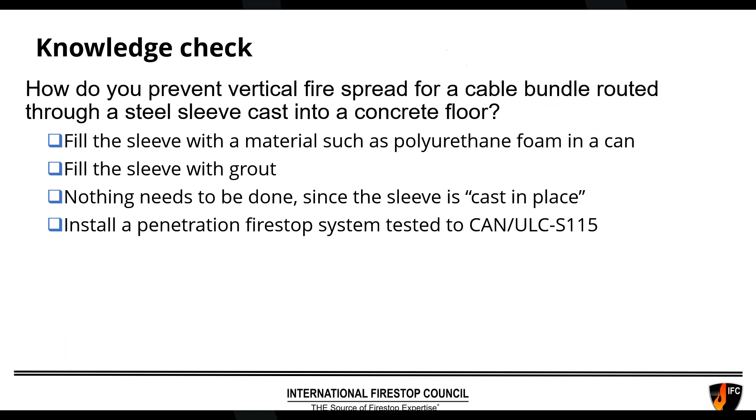And continuing onwards. There are a few cases where the penetration fire stop is going to need not just an F rating, but an FT rating. Essentially, those are 3 cases, so I've itemized them here. You're going to need an FT rating for the penetration in firewalls.

Firewalls are true, structurally independent walls that don't collapse in the event of a fire. Most of the walls that you and I and we all see are fire separations. They're not true firewalls, because why? They will come down if there's a fire eventually. A true firewall will stay standing even if the building completely collapses. So they're few and far between.

The next type of thing you need to have an FT rating for is the horizontal separation above a garage. So if you're going from a garage to a retail area, garage to a residential, that last concrete floor is going to need an FT rating for the through penetrations. And then finally, if you have a penetration through a horizontal service space separation, that penetration needs an FT rating as well. Just so you'll know, horizontal service space is not the same as a plenum space.

It's not just the space above your ceiling. It's where basically you have, I'll call it a horizontal shaft, where the separation truly is structural, has its own supports, not just something hanging like a ceiling. In case you're wondering if the penetrations you've seen out in the field had an FT rating, they would look something like this. The T part is not really generated by the fire stop per se.

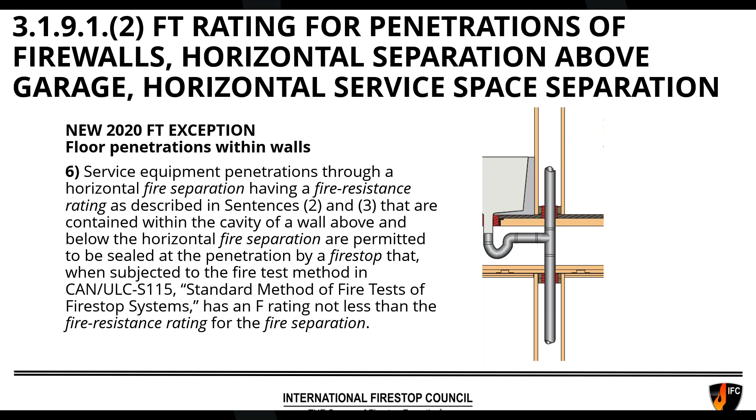It's generated by some kind of insulation. Basically, you have to keep the heat from getting into the penetrating item or the heat from getting out of the penetrating item. So it's going to be a lot more onerous, a lot more expensive. And so don't specify an FT rating where you don't need it. Matter of fact, the code has now given us some exemptions to the T rating. One exemption is similar to what's shown in the image: if your penetration is concealed in the wall both above and below the separation, the floor, you don't need an FT rating.

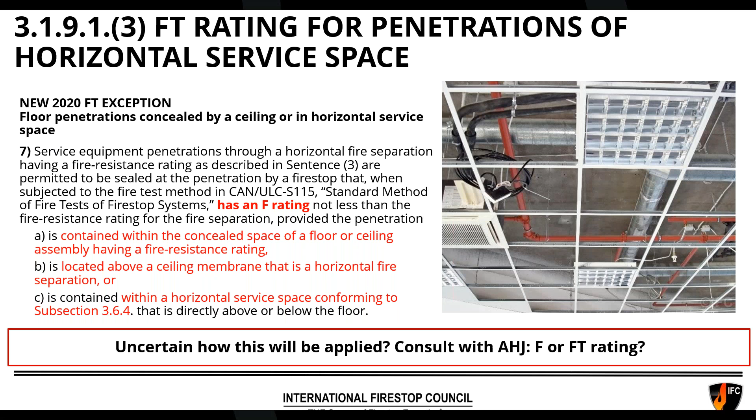If your through penetration is concealed in a rated floor ceiling assembly, or if that ceiling is even better, a horizontal fire separation, or a horizontal service space, then the penetrations above that would still need an F rating, but would not need an FT rating.

Now, before we finish with penetrations, I want to mention that the code has written some good additional information in the annex. In that first paragraph, you see a good reminder that it's not only for building services, but also for structural elements. So if you have a cable bundle and you have a pipe, beautifully fire stopped, great, but make sure you fire stop that steel joist going through or that steel beam.

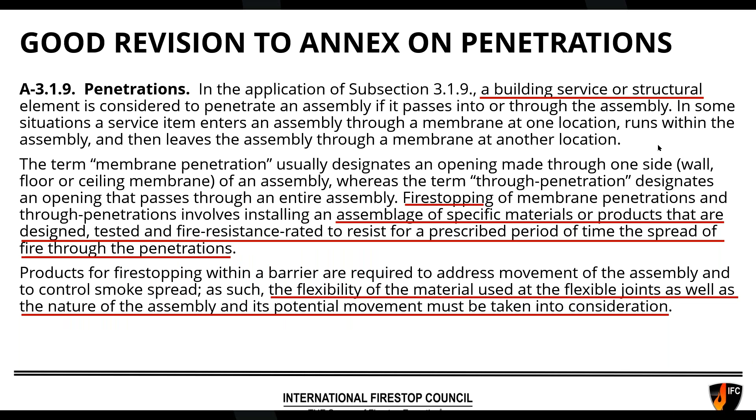In the middle paragraph, you see a reminder that fire stopping is an assemblage of materials. It's a system. And in the very last paragraph is a good reminder that the flexibility of the material used at the joints, as well as the nature of the assembly and potential movement, must be taken into consideration. So just some good annex material, just reminding you of doing the right things right.

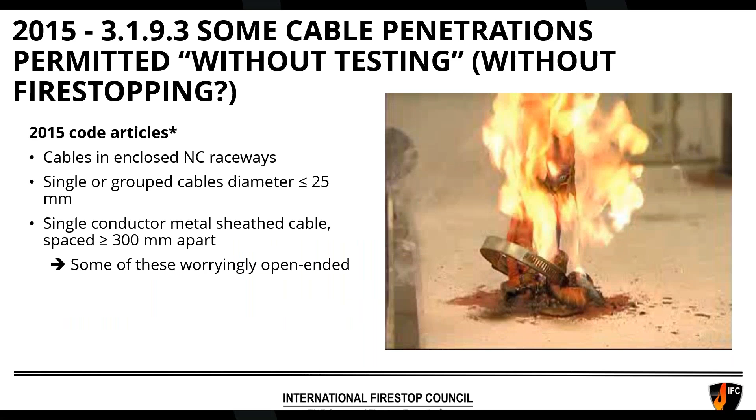Now, in the previous code, 2015 and earlier, there were some code exemptions that were not really clear. They said that certain things were permitted without testing, and they were often misinterpreted as not needing fire stopping. So nothing is further from the truth. For example, it mentioned 25mm cable bundles without testing. It did not mean without fire stopping.

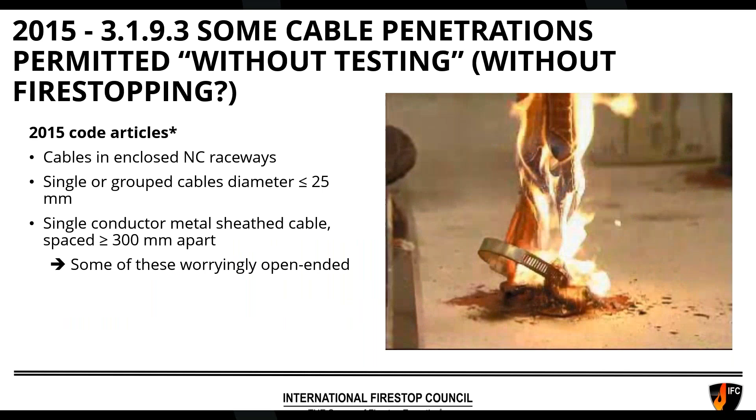Here's just a short video of a 25mm bundle in a very tight 25mm hole in a concrete slab. You can see that that's not a success. There were some other exemptions that are also a bit vague, so those were all deleted from the 2020 code. There's now a replacement for that, just to make sure that there's no confusion. There's now a blanket requirement for,

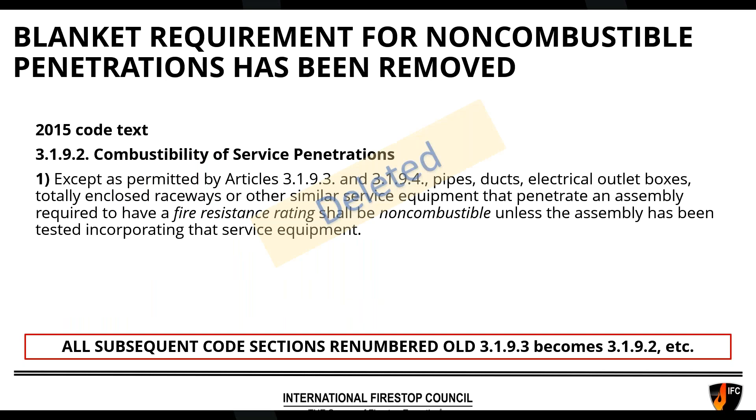there used to be a requirement that said that everything going through an assembly had to be non-combustible. And that was basically a leftover from decades ago when there were not fire stop systems for everything. That's been deleted because now there essentially is a fire stop system for everything. And just to make sure that people are aware that absolutely any penetration needs to be firestopped, there's now a new blanket requirement for all service equipment penetrations, saying they're all acceptable provided they're protected at the penetration with a firestop.

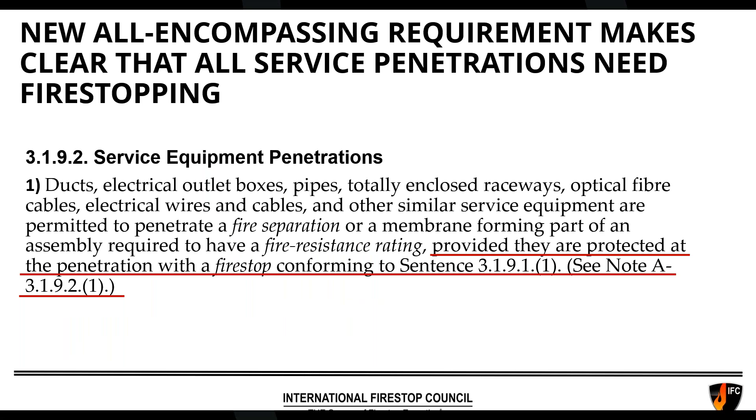Now, speaking of firestops, there's what I'll call a normal firestop and a super firestop. And the super ones are much harder to design. A normal penetration firestop is tested in that furnace at a pressure of 2.5 Pascal. The number doesn't mean much to you, but it's a very, very low pressure. For a plastic pipe going through a building, that needs an additional higher pressure on the fire test, and that's 50 Pascal, 20 times more.

So it used to be that that was needed in all buildings if you had a plastic pipe running through multiple stories. Now for the 2020 code, it's only when you exceed 3 stories, so 4 stories and above.

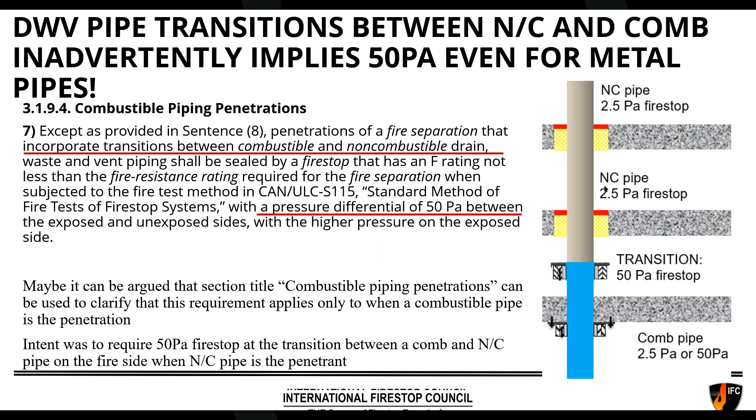Now there is a section on transitions, which is a bit deceiving. It says that if you have a transition between combustible and non-combustible, you need a pressure differential of 50 Pascal for the firestop. I just wanted to clarify that that's not really required for where the metal goes through. So if you just take my schematic here on the right, where the plastic pipe goes through, absolutely, you might need 2.5 or 50 Pascal based on the height of the building. If you have a transition point, you may need something to firestop that transition point, but where you have the metal going through the floor, there was no intention in the code to require 50 Pascal for any metal pipe.

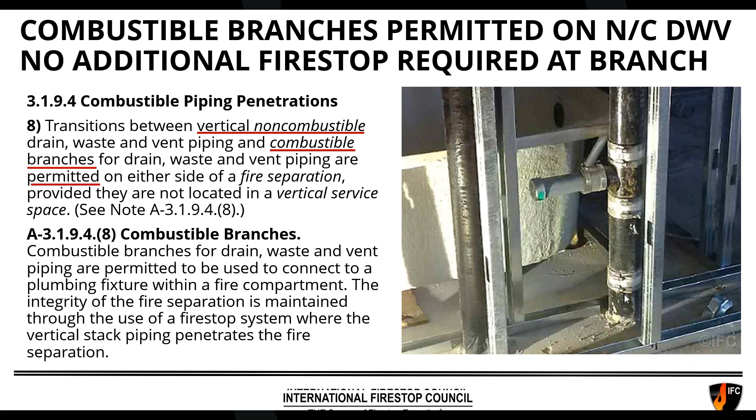Now, since the code does now mention transitions, there was some good data brought forward to the code committee that showed that if you have a non-combustible vent stack, so a non-combustible DWV pipe, that it's perfectly fine to have combustible branches. That does not require any special fire stopping at each floor. So again, it's a non-combustible DWV pipe with a combustible branch. The code accepts that without any specific fire stopping, just for the plastic branch.

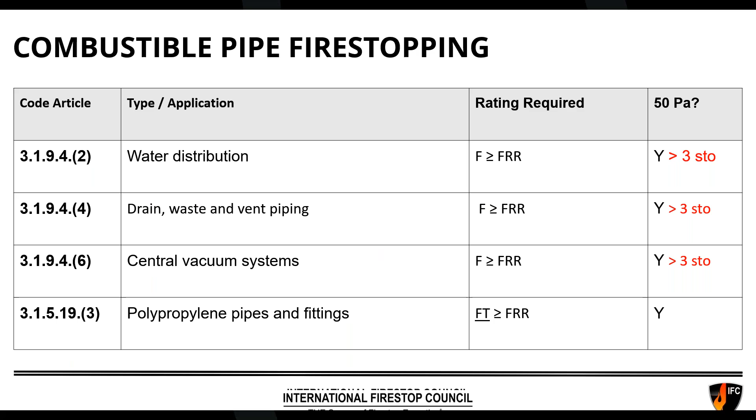As a summary, these are the plastic pipes that would need the 50 Pascal, the bigger pressure, the higher pressure on the fire test. The code specifies those based on usage, so water distribution, DWV, central vacuum systems, and polypropylene pipes.

All right, so let's do a knowledge check. Actually, I'll be honest, we're just going to blow through this one. I see I'm running short on time. So which don't require a firestop system tested to CAN/ULC S115? The only penetration out of these choices that would not require it would be a steel pipe cast into a concrete floor. Cable bundles all the time, plastic pipes, doesn't matter the building height, CPVC sprinkler pipes, all of these would need a firestop system.

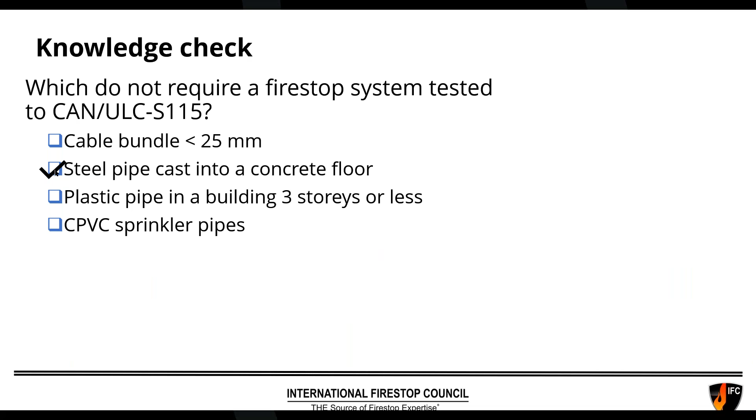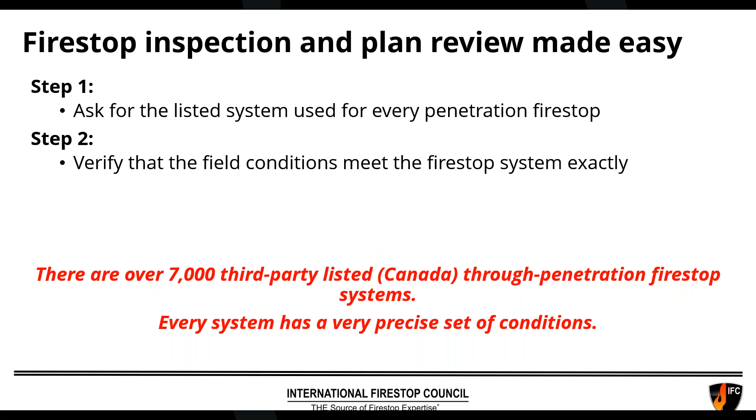So if you're doing plan review, again, fire stopping for penetrations, just like for a joint, must be a system. So if you're the one charged with checking, make sure it's a listed system and verify that the field conditions meet that listed system.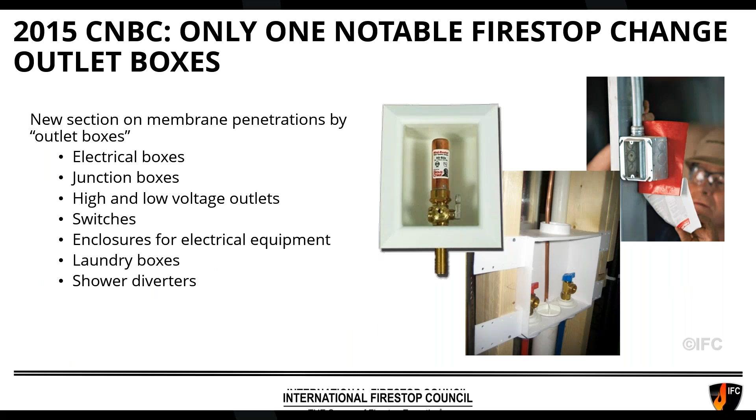Let's next quickly talk about outlet boxes. I am running short on time. It's important to realize that outlet boxes means all recessed boxes, not just what you would think of as where you plug in your computer or something else. So it's enclosures for electrical equipment, big boxes, laundry boxes, shower diverters, etc. The code has required this since the 2015 code, so this is not new. The requirement for outlet boxes is that you have a firestop system with an FT rating.

Now here's the good news. Anything listed in the ULC directory will have an FT rating when it comes to outlet boxes. So you don't have to worry, does it or doesn't it? UL has decided that anything they list for Canada for outlet boxes will have an FT rating.

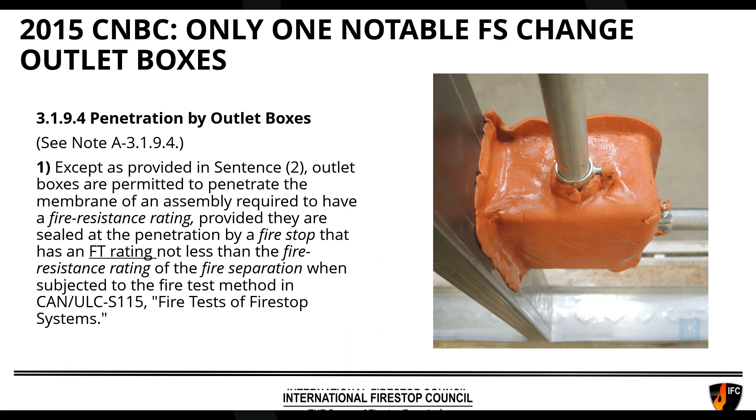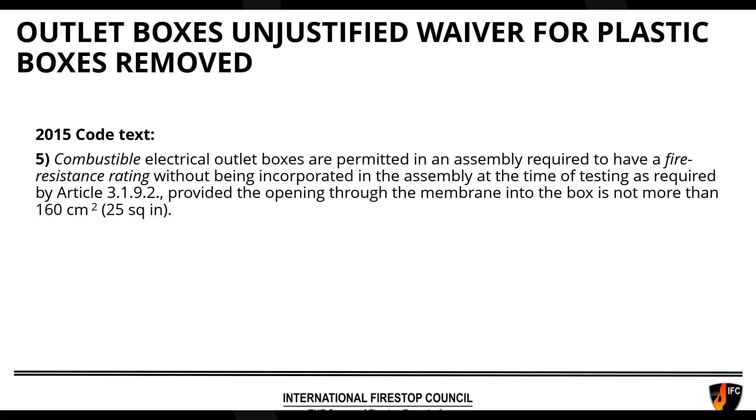In the 2015 code, there was somewhat of an exception, saying you didn't need to be incorporated at the time of testing. It was somewhat vague wording on plastic combustible electrical outlet boxes. It was realized that that was causing confusion. Some people didn't realize that they still need to be fire stopped. So that wording was deleted in the 2020 code, and it was replaced with something much clearer that says that basically, yes, combustible outlet boxes are allowed, but they must be sealed at the penetration with a system having an FT rating.

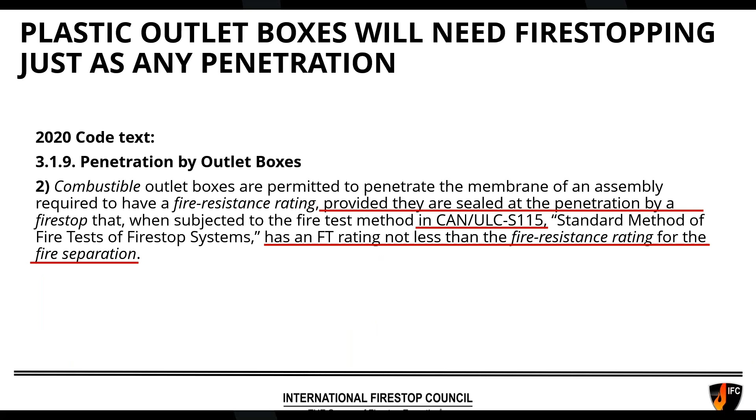Now for steel boxes, they don't all need to have fire stopping. It is permitted to waive the fire stopping for steel outlet boxes, but you have to meet 4 conditions. So first of all, they can't be too big, not more than 25 square inches. You can't have too many, not more than 100 square inches per 100 square feet of wall area. The annular space around the box can't be too big, and that's defined as 3 millimeters. And finally, they can't be too close together on opposite sides of the wall, and that's defined as 600 millimeters.

And that's a horizontal distance. You don't measure it in a straight line. You measure it like 2 plumb lines dropped from each box. And if they're not 600 millimeters apart on opposite sides, you're too close, and that needs fire stopping.

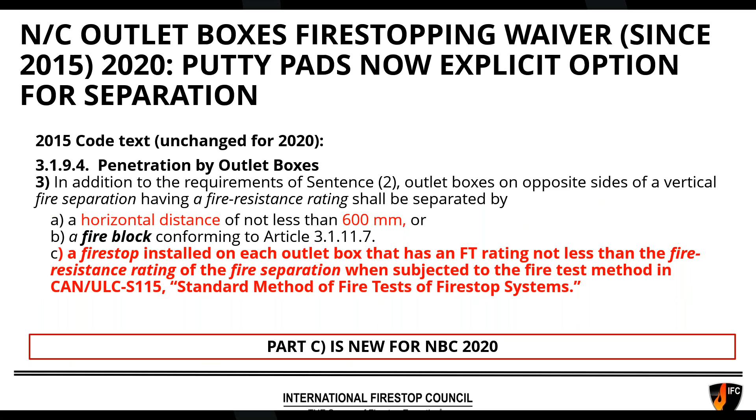So the code does remind us in option C here that if the only thing you're missing is that they're too close, a good way to solve that problem, to prevent a zigzag fire spread from one side of the wall to the other, is with a Firestop having an FT rating. So we're going to skip this as well. Just want to remind you that you have to meet all of those with the metal box so as not to need a Firestop. They have to be not too big, not too many, and not too close together.

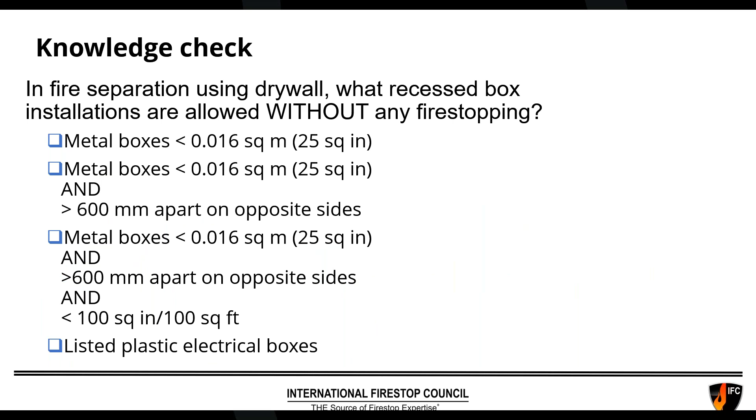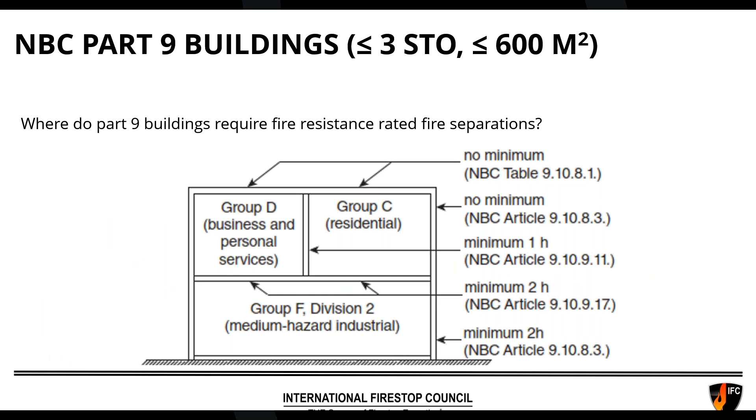Now let's just discuss Part 9 buildings a little bit. In case you thought Part 9 buildings wouldn't even have fire separations, absolutely they might. The most common would be for separation of different occupancies. So here's an illustration from a National Research Council of Canada publication, just giving an example of a live-work unit.

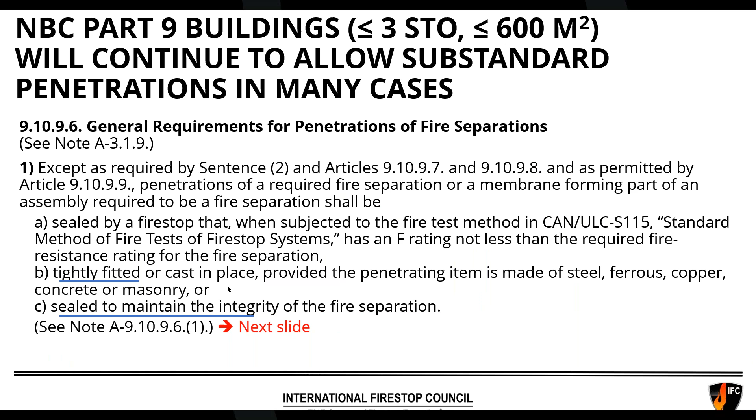Now for through penetrations, they did add the option A, of needing a Firestop system. But they did leave in place the options from the previous editions of the code to be tightly fitted or sealed to maintain the integrity, or tightly fit or cast in place. Now, those are somewhat vague. If you read through all of Part 9, and we don't have time for that today, sometimes option C is not allowed, sometimes option B is not allowed. But in most cases, option B might be allowed.

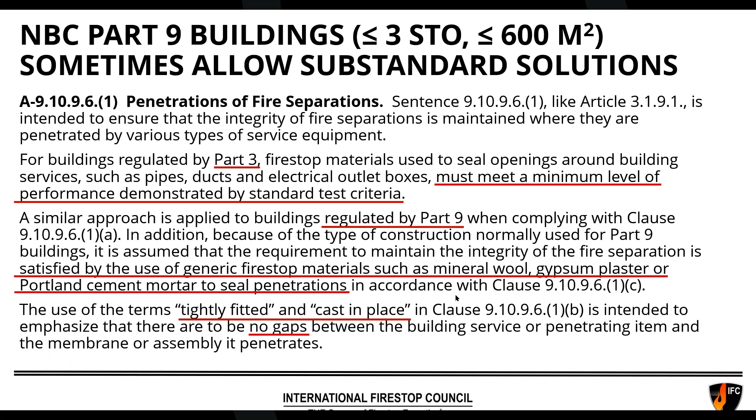Now, if option C is allowed for your specific situation, the annex indicates what that should be. They refer to it as generic Firestop materials, even though there really is no such thing as a generic Firestop material. But for a Part 9 building, it is a much smaller building, 3 stories or less, 600 square meters or less. They do allow some penetrations to be sealed just with mineral wool, gypsum plaster, Portland cement. Now, to be honest, that may or may not work, and that's why option A is really to Firestop. But if the code allows it and you decide to do it, I guess you are code compliant. But the preferred alternative would be, of course, to have a true Firestop system.

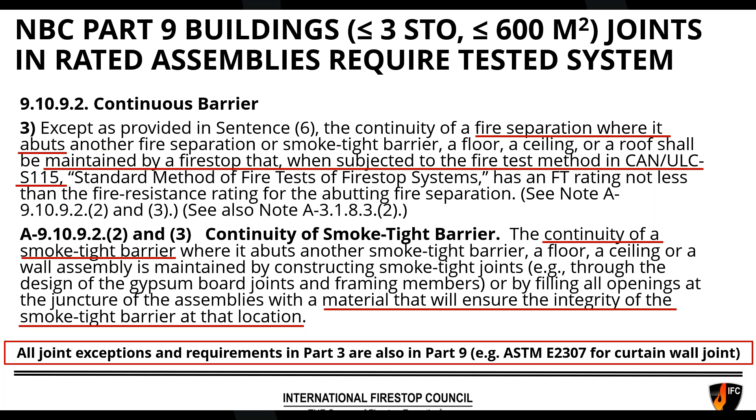Now for joints, I won't go through the wording. It's identical to what's in Part 3. And so a Part 9 building needs all joints Firestopped, just like a Part 3 building. And by the way, for a curtain wall, not mentioned here, a curtain wall again has the exact same wording as in Part 3 of the code. If perchance your small little Part 9 building has a curtain wall, then yes, it would need to be Firestopped, just like a Part 3 building code building.

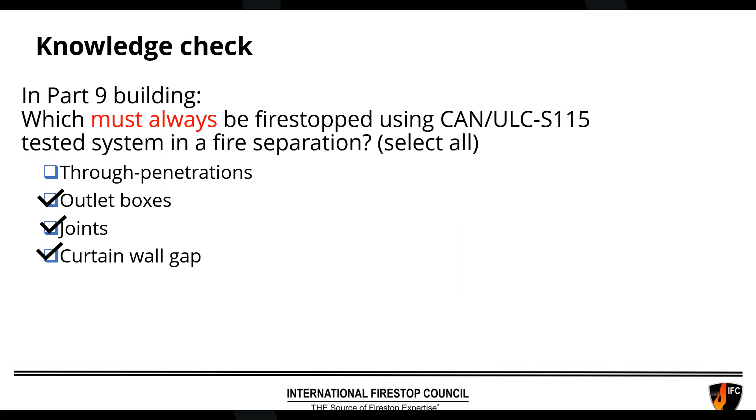So a quickie quiz. Again, Aaron, we won't run the poll, but in Part 9 buildings, which must always be Firestopped, essentially it's outlet boxes, joints, and curtain wall gaps. Always, the wording is identical to Part 3 of the building code. There are some cases in Part 9 buildings, though, where through penetrations might get a relaxation. So you have to really dig through the specific situation in Part 9.

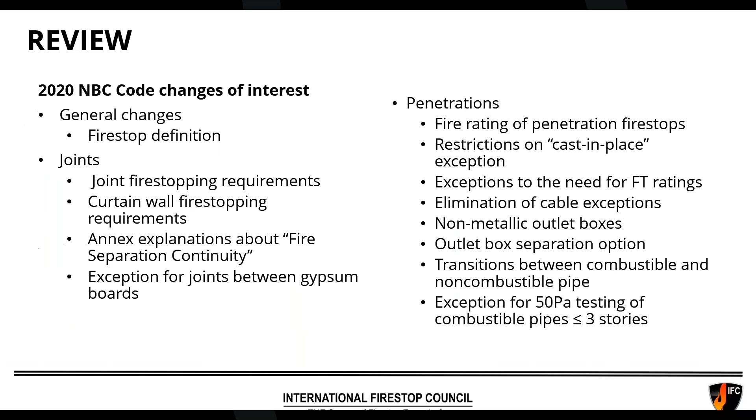So you'll have this in your handout. It's basically a review of all the changes I've gone through today. What I wanted to mention is that if you wanted more information, please refer to the IFC's website for that. We put all the Canadian information on one handy page, so it's easy to remember, firestop.org/Canada. Couldn't be easier than that.

So we have some useful reference guides that you can download. There are some magazine articles there that were published by Construction Canada magazine that go over a lot of these changes. And there's a great little video published by the National Research Council of Canada, Canadian Board for Harmonized Construction, about 20 minutes long, doing the same thing as I just did today, maybe a lot more briefly, just in 20 minutes, going through the changes. You see, if you do go to that page, I encourage you, if you're not already on it, please join our mailing list.

Now, finally, for those of you who are with jurisdictions, the IFC has always offered throughout its 30+ year history to do live seminars for code officials. So if you're a code official and you thought, hey, this was good information, the IFC does offer live in-person NBC 2020 Firestop seminars. Just send a request to info@firestop.org and we will hook you up. We'll get presenters on a mutually agreeable date.

And you can let us know if you just have a little bit of time, like today, kind of rushed, to be honest, 1 hour, better would be 2 hours, 3 hours, or 4 hours. So we do have an NBC 2020 seminar that could be 4 hours long, and that will go into lots of great detail, make it really easy to understand.

So with that, I'll ask my colleague, Aaron. Aaron, are there any questions or comments you'd like us to address? Yeah, thank you, John. There is one question. Regarding section 3.1.8.3 on FT rated joints, what happens when we have a structural member or non-combustible penetration through the plane of the joint? Does the penetration now require an FT rating?